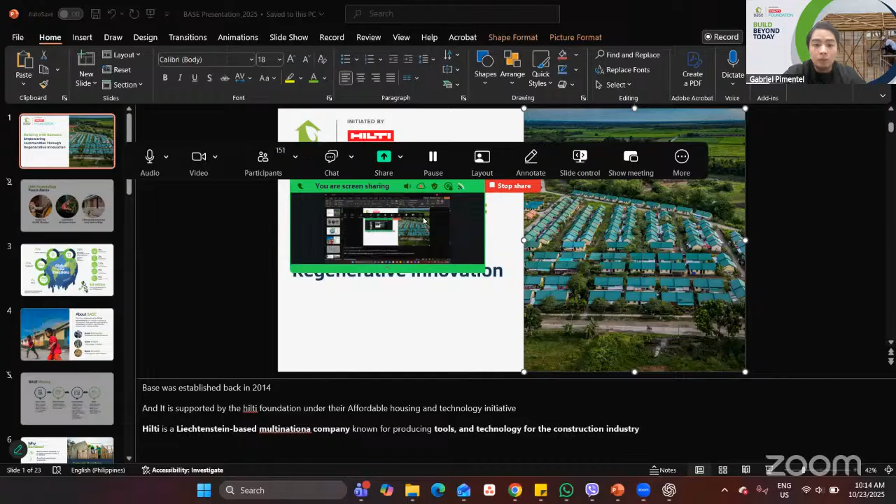I'm sorry, there's just some problem with the sharing options. No worries, sir, I think you are sharing your whole screen. I'm trying to share just a portion. Okay, because I have a lot of notes for today's session. Is it visible? It is visible, sir, but I think the control panel is overlapping on the presentation. If we can drag it down or maybe to the side, it's covering part of the slides. How about now? The controls are still visible, sir. If we can drag it down, it would be better. We can see the whole slide, but the controls are visible as well. Sorry, the meeting control.

How about this one? It's good now, sir. Okay, so I'll just do the presentation now without the notes. Thank you, sir. Okay, so before we start, just a question, Sir Edward. Do we have any international audience? Is it okay for me to speak in Tagalog there? I think there is one who reacted in thumbs up, sir. So maybe we have an international audience. Okay, so I'll just speak in English. So sorry for the delay.

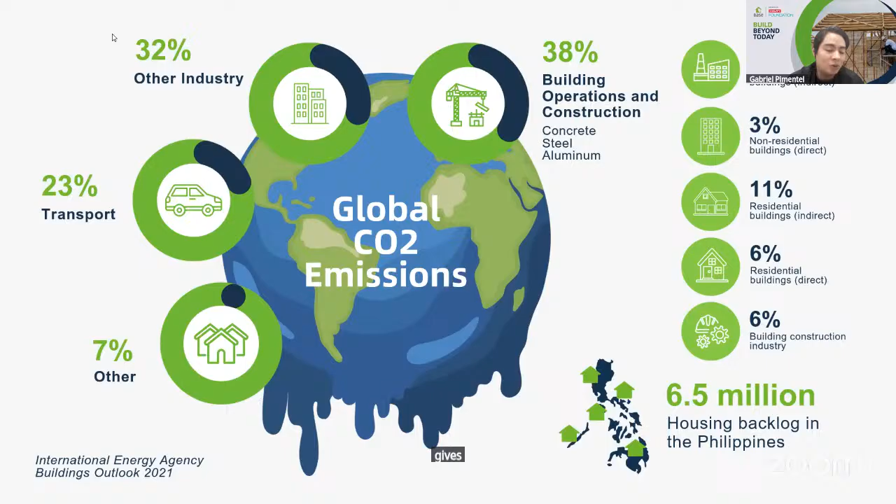So about Base Bahay, we're just a technology provider. Yes, we build some houses, but most of our work is trying to get the technology out there for other professionals, engineers, architects, builders who want to try to use our technology. So we have three arms. We have Base Innovates, our research and development arm. Base Builds, our technology transfer. And lastly, Base Enables. This is our training and value chain arm, which I will discuss later.

So why do we use bamboo here in Base Bahay? I guess this is the most self-explanatory part of this discussion. We use bamboo because first, it's a nature-based material that is widely available where it is needed.

Why is there a line here? I think there was an accidental annotation. Is that me? I am not sure, sir, if that's on your part. Yeah, it's already clear now, sir. You may proceed, sir.

Removed it. Okay, sorry. So why we use bamboo? First, it's a nature-based material that is widely available where it is needed. Our Base Bahay projects are typically located in the provinces to provide housing options for the marginalized, so bamboos are naturally available there. It also has excellent mechanical properties. It is actually not that correct to say that bamboo is comparable to steel, but bamboo is extremely strong, specifically along its fibers. So it's strong in compression. It's also good in bending, but I'm not gonna say it's comparable to steel.

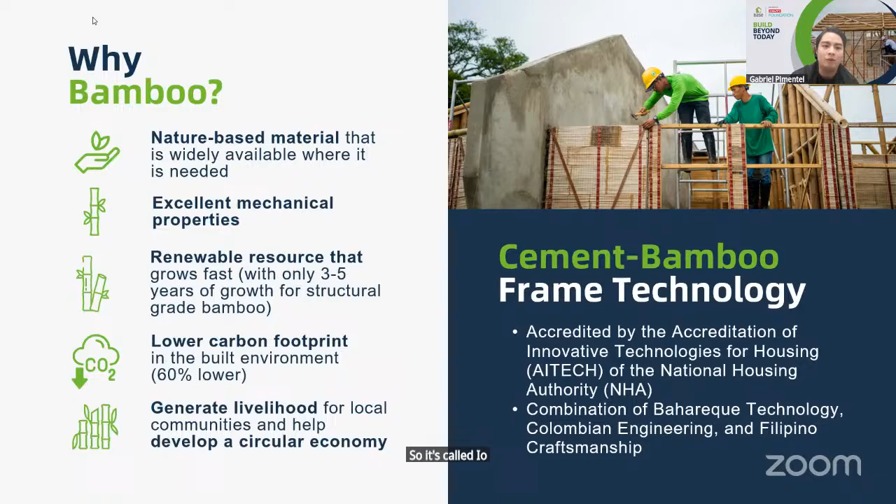So just to segue a bit, in the Philippines, we have the National Structural Code. Civil engineering students are very aware of this. So we have this National Structural Code, but there is no provision for bamboo in that code. So to work around it, we had this accreditation to allow us to build houses in the Philippines. It's called AITECH of the NHA. Okay.

So some of the features of our CBFT houses: first, when we say bamboo houses, the first thing that comes to mind for some people is our bahay kubo, right? And normally we have the perception that bahay kubos are not that great. They usually last just a few years, etc. So there's a perception in the Philippines that bamboo houses are cheap, weak, etc. That's not the case for our CBFT houses.

It is permanent housing with a minimum lifespan of about 50 years, what we would expect from a typical concrete or steel structure. It's also disaster resilient, as I will show later. It was tested against earthquakes and typhoons. And it's also insect resistant. That's one of the common questions about our bamboo houses. It is insect resistant because we follow a treatment program that we share with our treatment facility partners.

It is also fire resistant. We have specific wall components that are rated up to 2 hours. And most importantly, it is cost effective. Our houses are about 20 to 30% lower than a conventional structure of the same type, like residential structures. If I'm not mistaken, our latest project costs just about 14,000 pesos per square meter.

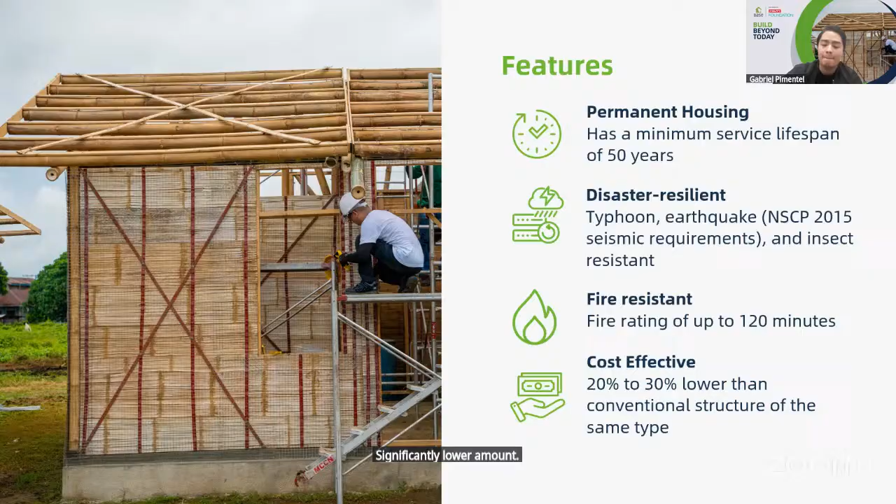And from last I checked, the typical cost of a single-story residential structure is about 20 to 30,000 pesos. So that's a significantly lower amount. So here's a short video to show you the process of how our CBFT houses are made.

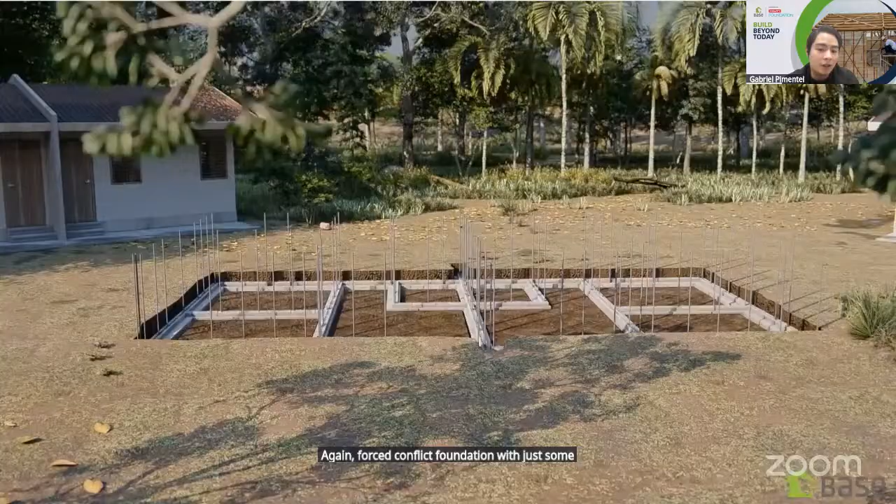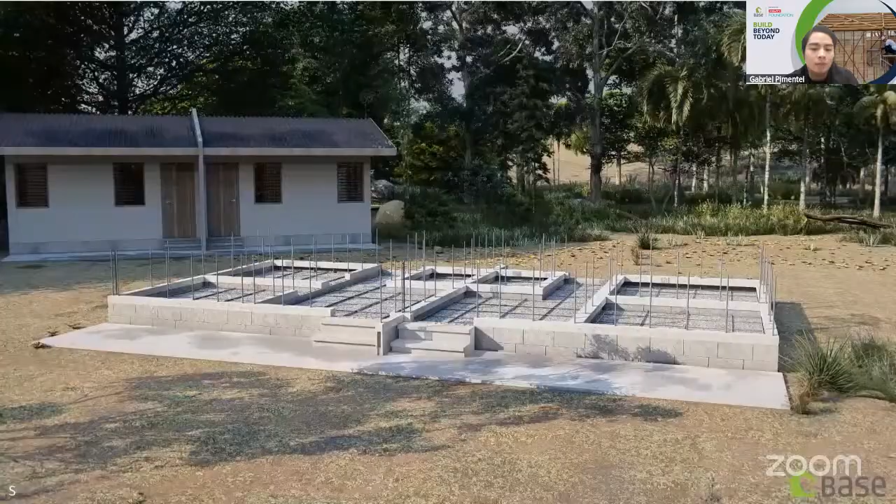So our CBFT houses start with a typical foundation, like other structures. It starts with an RC, a reinforced concrete foundation with some exposed dowels. Those exposed rebars or dowels come into play when we attach the prefabricated bamboo wall panels. Okay, so the flooring is being done. So now the foundation is ready to receive the wall panels.

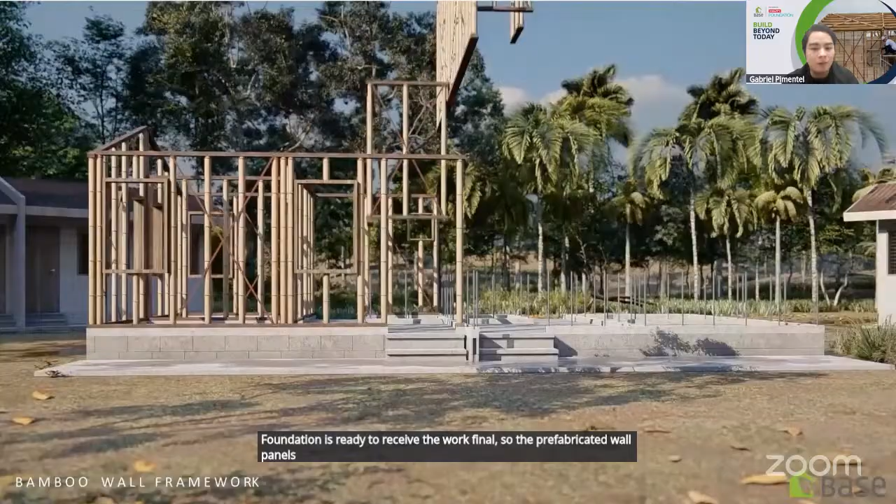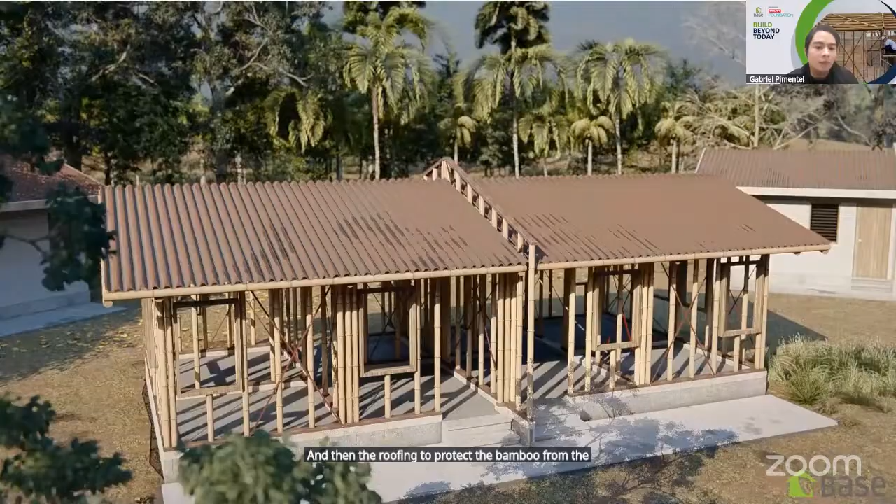The prefabricated wall panels are just placed onto the dowels. And then to fix those panels into the foundation, we drill holes in the bamboo and mortar infill those holes to provide a stronger connection for the panels. Once the panels are set, we place the purlins and then the roofing to protect the bamboo from the weather. And then we start with the finishes. We close up the walls, the claddings, then finishes. Yeah.

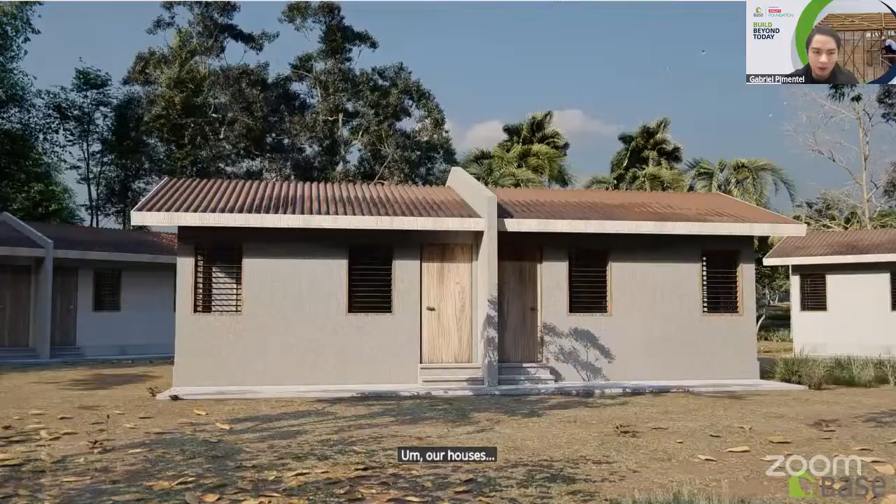So this is just a short animated video to show you how the CBFT houses are built. And actually, a fun fact: this whole process from foundation to finishes only takes about 5 weeks. And the placement of the prefabricated wall panels is so easy it can be done by unskilled, untrained workers.

Because we usually get some helpers from the Hilti Corporation that come from their offices to the Philippines to help build these houses, and they can actually do the placement of the panels in about 4 days. These people are office workers, not skilled workers.

Okay, so here's another video to show you how our CBFT houses perform under seismic load. This is a shake table test conducted by the Universidad de los Andes in Colombia. The demand they used here is the 1995 Kobe, Japan earthquake with a peak ground acceleration of 0.82 g and peak ground displacement of 17.7 cm. So here's how the CBFT house performs.

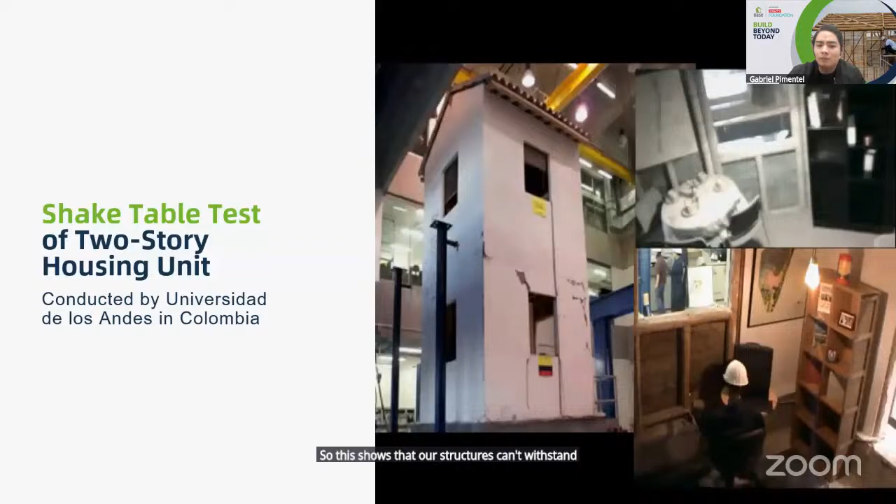So another thing, Base Bahay was founded back in 2014, and then we also constructed our pilot houses back then. There were 3 pilot houses located in Bicol. And unfortunately, during the same year in 2014, Typhoon Glenda, a super typhoon, hit. And our site was directly in the path of the typhoon. And if I remember correctly, UPLB was also hit by this typhoon, and a lot of trees were put down by it.

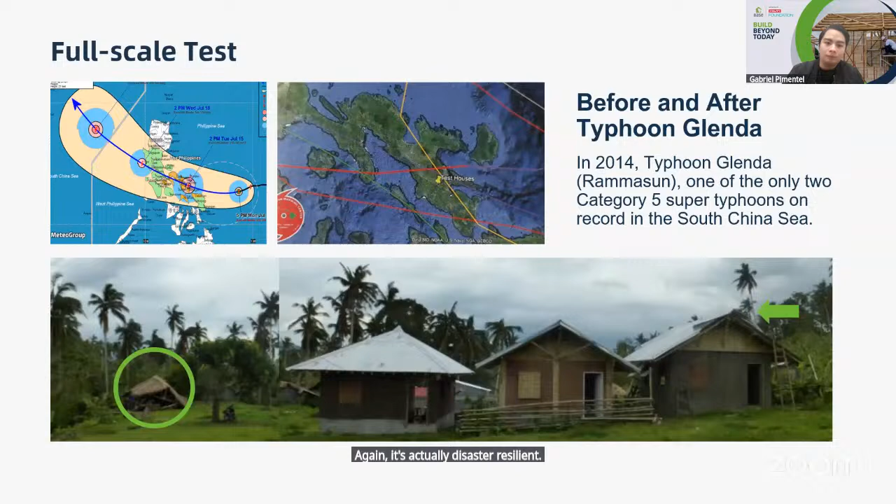So let's discuss the three arms of BASE Bahay. The first arm is BASE Innovates. The BASE Innovation Center was established back in 2021, and it focuses on four things: research and development, codes and standards, training and learning, and international technology transfer.

For research and development, we do a lot of different research here in the BASE Innovation Center. We do material characterization of different bamboo species. We do connection tests. We do full-scale wall panel tests. Those tests give us insight on how we can develop or improve our existing codes and standards. For training and learning, we do CPD programs, and we train our students to do the tests themselves. And for international technology transfer, we dabble in international codes and standards, plus we accept international interns from different universities.

So one of the things that we do here in the BASE Innovation Center is the characterization of mechanical properties used for structural design and standards. As per the ISO standards, the recommended number for bamboo is about 30 per test. We do about 6 types of tests: compression parallel, tension parallel, bending perpendicular, shear parallel, tension perpendicular, and bending parallel. For tension parallel, there are three different types. So in total, we do 8 types of tests for a complete characterization of a single bamboo species. ISO requires 30 tests, but the BASE Innovation Center recommends 100 tests. So in total, we need about 800 tests for a full characterization of a single bamboo species.

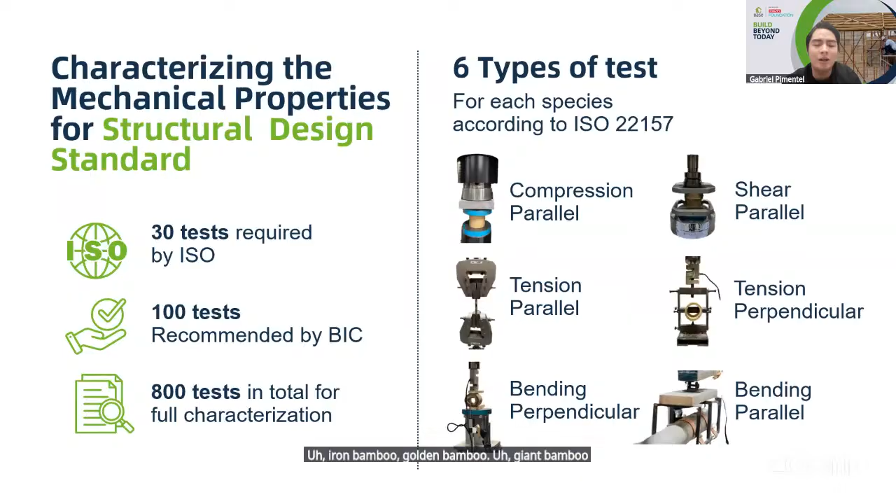If I haven't mentioned it yet, BASE Bahay Foundation, with the Association of Structural Engineers of the Philippines, ASEP, recently released the PH guidelines for bamboo in the Philippines. We actually have a CPD program in our Makati office tomorrow for the recently launched guideline.

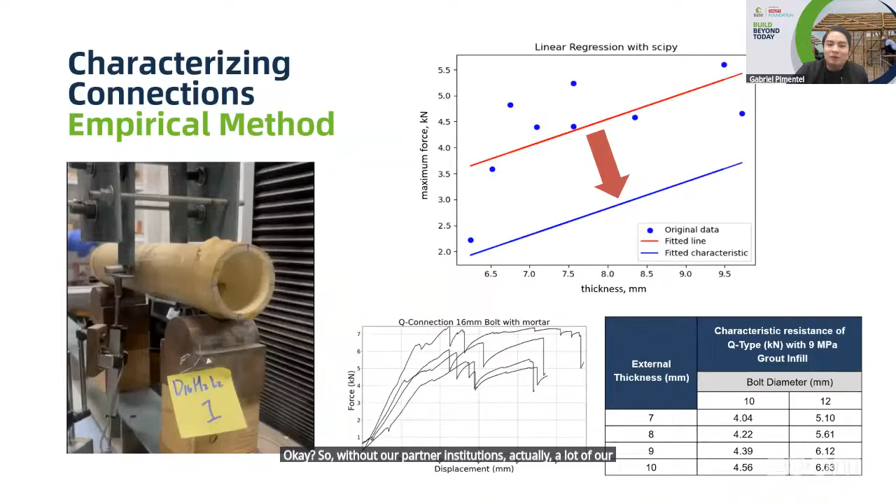So without our partner institutions, a lot of our experiments here, like mechanical properties, connections, and wall panel testings, won't be done because here in Base Bahay, we're just a small group. Like here in the office right now, we're less than 20. So we do have some partner universities, local and international, to help us do the studies.

So as for the impact of the Base Innovation Center, since it has been established, we've been able to train 300 plus local and international interns. We've also been able to do 91 student research, 12 published journals and 14 conference papers. We're also in the process of developing codes, guidelines, and manuals for different countries: the Philippines, Colombia, Fiji, Peru, and Nepal.

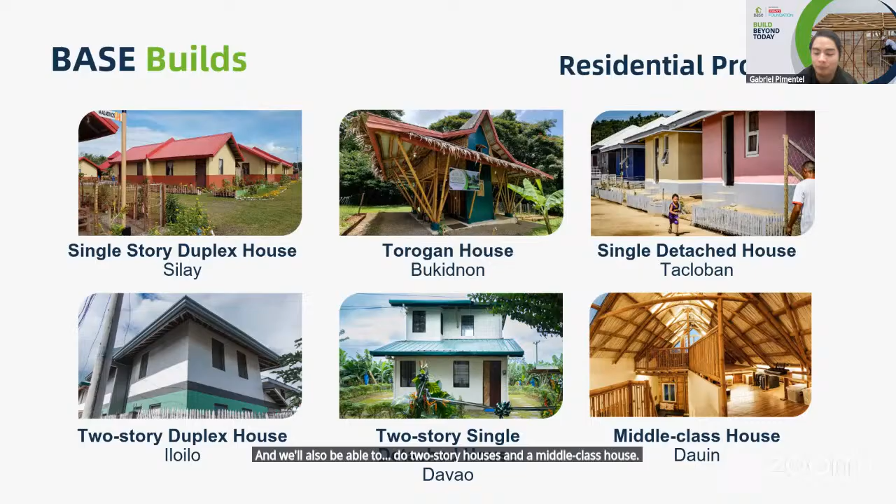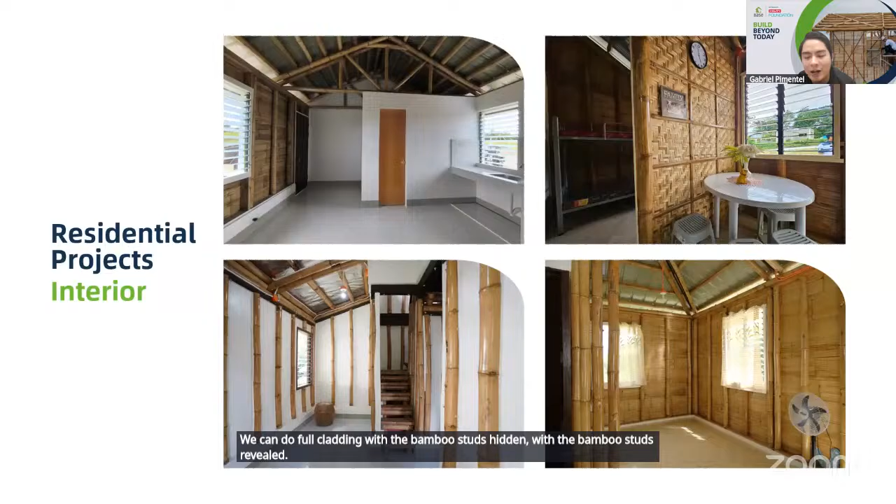So these are for residential projects. For the residential projects, there are a lot of options for the interior. We can do full cladding with the bamboo studs hidden, or with the bamboo studs revealed. We have flattened bamboo, we have woven bamboo. There's a lot of options.

So we also do non-residential projects. We do community centers, office buildings in Batangas, school buildings, weaving centers, and food processing centers. And we're currently working on a project to build, I think, a community center in BGC that is made of bamboo.

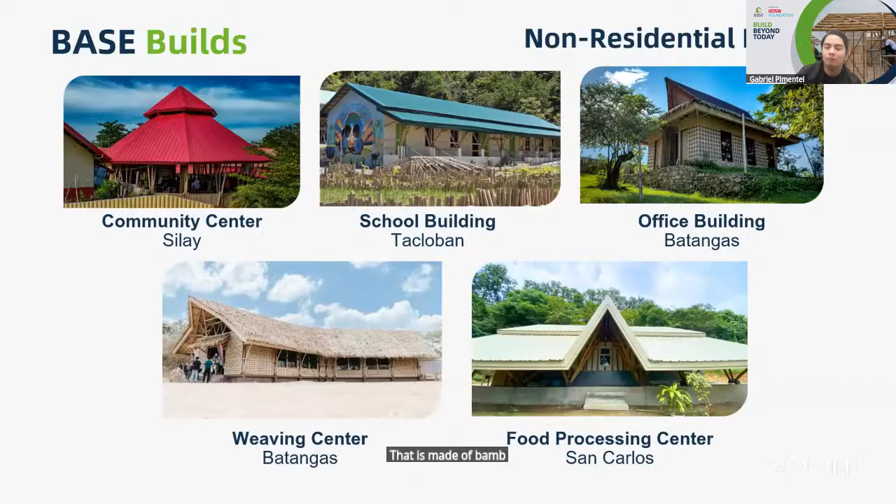So these projects won't be possible without our community partners. We work with local government units and nonprofit organizations, local and international. Some of these might be familiar to you, like Gawad Kalinga, Habitat for Humanity, All Hands and Hearts, and UN Habitat. We also work with social enterprise and private partners, for example, Kanya Kawayan and Kawayan Collective. These are our treatment facility partners.

So other than Base Innovates and Base Builds, we also have Base Enables, in which we try to improve the bamboo value chain, starting from harvesting up to the construction site. So here in Base Bahay, we've helped establish 9 different independent bamboo supply and treatment partners in the Philippines: Isabela, Nueva Ecija, Batangas, Negros Occidental, Negros Oriental, Davao, Cotabato, Polomolok, and Bukidnon. And we have also helped establish treatment partners in Nepal and Sri Lanka.

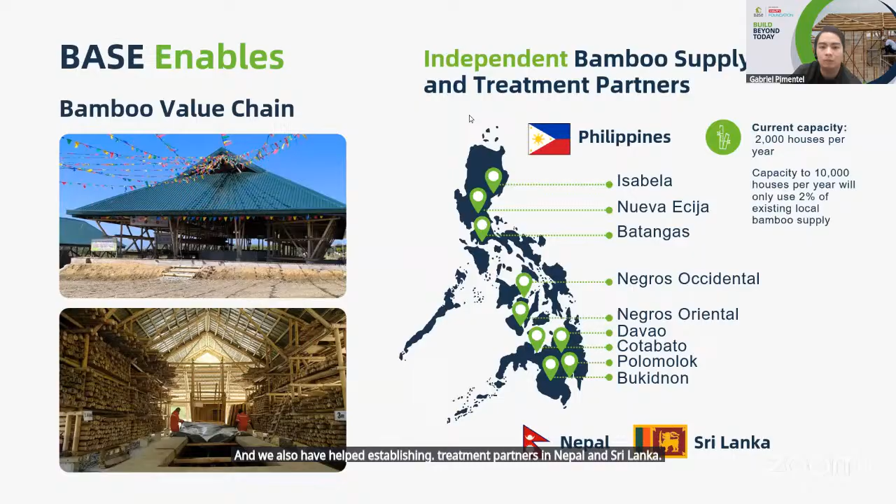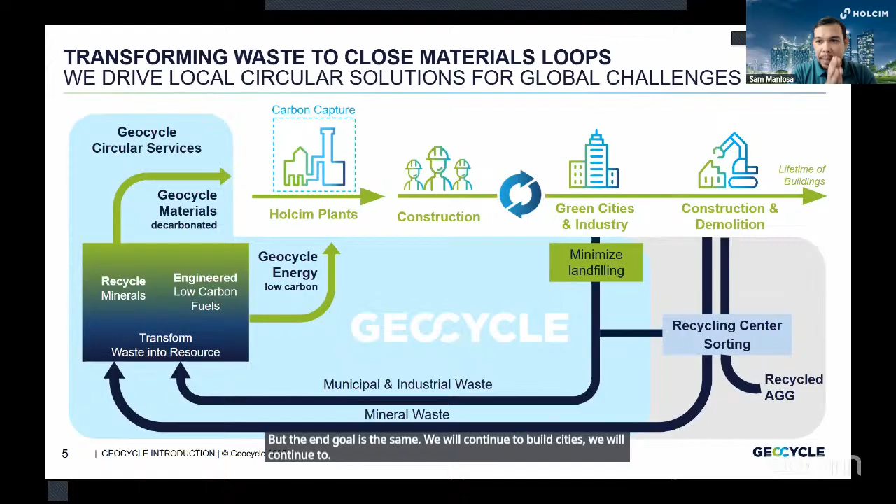But with scale and complexity, you need to put a lot more resources, technology, innovation, and automation into making sure that becomes sustainable. The end goal is the same: we will continue to build cities, we will continue to create buildings and infrastructure, but we do it in a more responsible and sustainable way.

You'll see here that the technology is called co-processing—it's the one in the middle. And we sit right at the crux of what we feel is... how do I say this... we're making ourselves a last resort, basically.

You always want to reduce. Prevention of consumption is always the best and most desirable method for waste management. If you cannot prevent or reduce, you reuse—you create many cycles out of one material instead of having it be single use. And then once that's done and it gets to the end of its life, you decide: how can I recycle this, upcycle it, make it into something else, so it finds a second purpose. And then only then do we come in.

If all of the previous steps are already exhausted and the material really needs to be thrown away, that's where co-processing can be a viable alternative. Instead of the material sitting and decomposing somewhere, it gets one last purpose: to generate energy for a material we need to produce anyway.

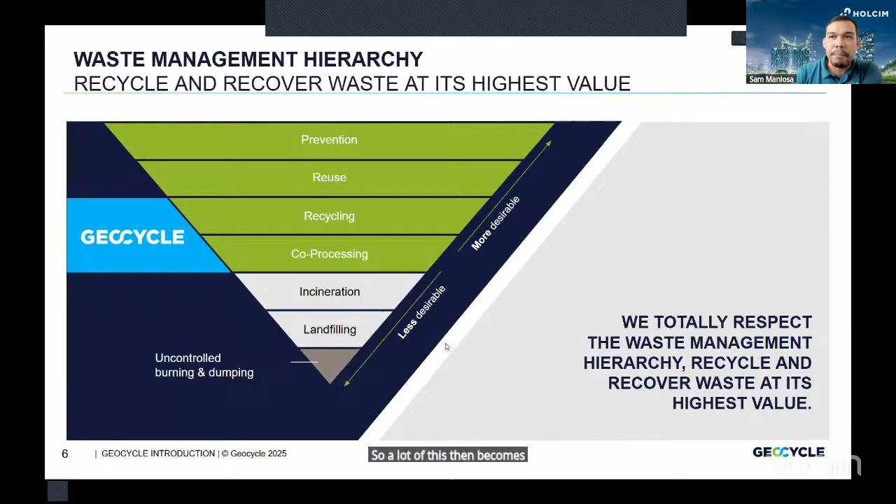Below that, you would have incineration, you would have landfilling. In the Philippines, what we call landfills are typically open dump sites most of the time, and this is uncontrolled—some people burn it, it gets dumped everywhere, there's no control of leachate generation. A lot of this then becomes a major environmental issue that is left unregulated and uncontrolled.

Maybe quickly just to touch on that—some people actually think what we do is incineration. It's a fair comment, but there's more that goes behind it. At the end of the day, whatever we do with the waste, remember that the most important parameter for us is still the quality of the cement that comes out. That's still the most important—at the end of the day, our business is to produce cement.

Whatever you input, however you input it, you need to make sure that process does not disrupt the cement manufacturing process. Which is why it's called co-processing. You want to do two things with one process.

You want to produce cement and also recover energy from certain materials without changing the outcome. Incineration is a much simpler process where your whole purpose is just an elimination exercise. You have a material, you subject it to high temperature, you expect it to be gone after it is burned. That's it. So the controls that you put into it, what happens after the combustion process, the waste that you get to produce after.

There's a lot of ashes that come out of it, it's a separate problem. But in our case, the cement manufacturing process is already inherently a very thermally intensive process. We operate our kilns at more than 1,500 degrees, and we use that process already in action to generate the energy coming from the material. So it's a two-in-one process, treating the waste while making sure you produce cement.

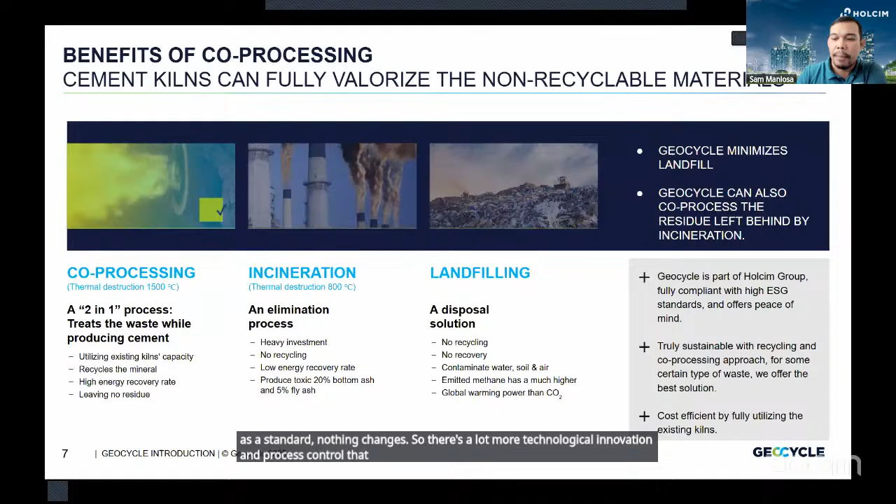We have facilities all over the world. We can treat different types of waste. And as I mentioned, it's really important that every type of waste gets its own treatment process and recovery process very, very specifically. You cannot just lump wastes and assume they're going to be treated the same way.

That's crucial. Every type of waste contains different types of chemicals. Calorific values are different, moisture levels are different. If you want to maintain control of your process, you want to make sure that all of your inputs are tightly regulated. And in all of this, we follow very strict health, safety, and environmental standards to make sure that everything remains compliant.

So one thing that I always say is this, because there's always going to be questions. When you co-process municipal solid waste, for example, does that change your emission characteristics? Do you produce more CO2? So what happens in cement? What happens in your operations? Our operations in Holcim have continuous emission monitoring systems.

For every second that ticks, one data point is taken out of the effluent stream. One data point on one specific parameter, and you monitor like 15 different parameters. Everything from NOx to SOx to VOC, CO, CO2, oxygen levels, moisture. There's a whole spectrum of materials that you monitor, and it's called a continuous emission monitoring system.